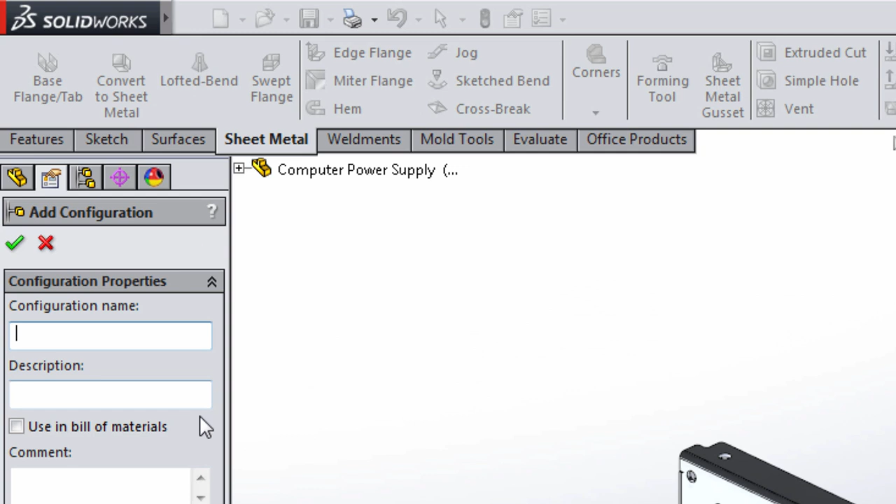To do this, however, we need to start in SOLIDWORKS and document the individual steps. I'm going to do this using configurations, and I'm going to label my steps based on number. So we're going to start with step 1. You'll notice that I call it step 01, and this is because SOLIDWORKS orders your configurations by the text, not the numerical value. So the very first step we're going to do is we're going to show this in its

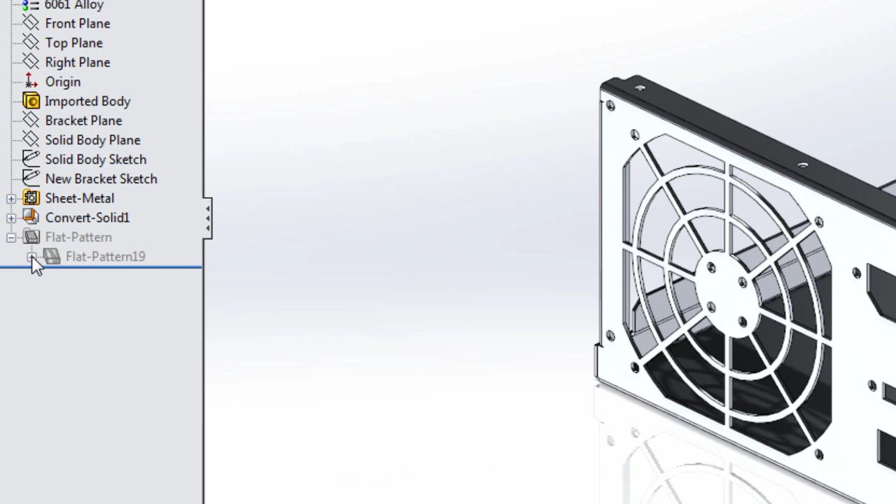flattened state. You can quickly click the flatten button to accomplish this, but another method you can use is going into the flat pattern feature file. You can actually suppress this flat pattern feature. This is ultimately what controls the flatten button inside of SOLIDWORKS anyway. So we've documented the first step. Let's go ahead and start to get into the actual forming operations for this part.

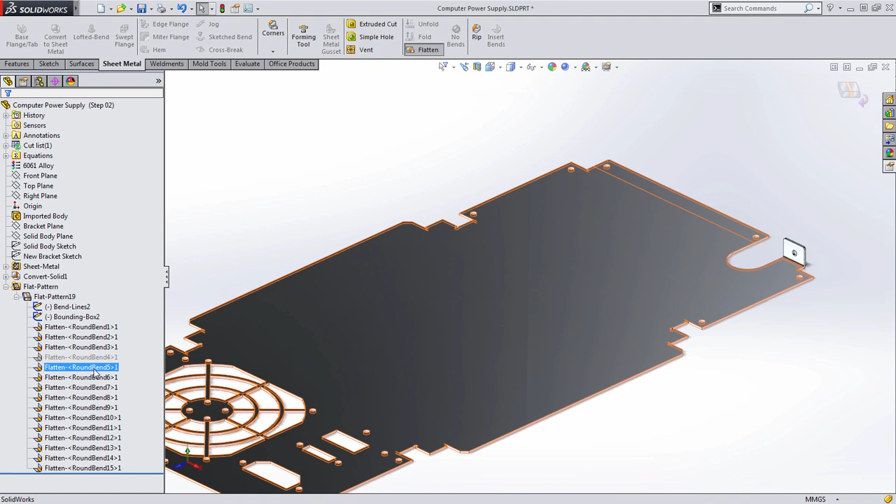I'm going to create another configuration called step 2, and what I'd like to do is show these flanges that need to be formed on the top. If we expand that flat pattern feature, you'll notice a series of flatten features in here, and when I hover over them, they show a line on the part for the individual flange or the sheet metal feature they're meant to unfold. All we need to do is suppress these individual features, and SOLIDWORKS will make the necessary features in the SOLIDWORKS model fold. So here you can see that I've created a configuration that shows just those flanges.

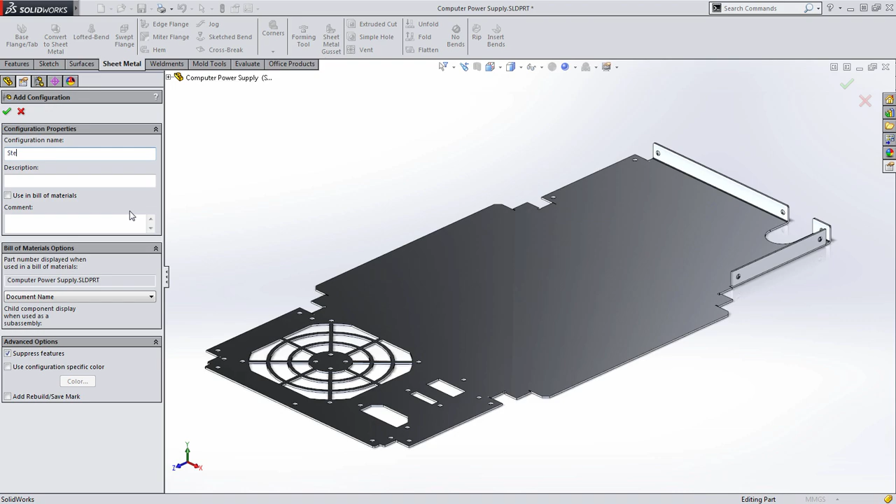Let's create another one, step 3. Again, we're going to perform the same process where we're going to go into the feature manager, find the relevant bend that we want to fold, and simply choose to suppress that flatten feature. We'll continue this process until the entire model has been reformed into the fully formed part.

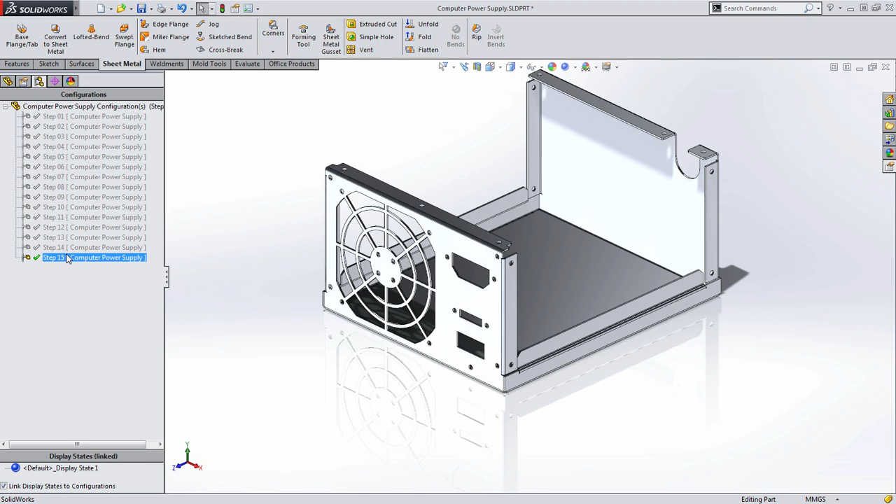At this point, we've created all but our very last step, but for this, we're going to go ahead and use the original default configuration. So you can at this point simply just rename that to be the last step in the process. So all of the configurations have been named steps 1 through 15 in this process. The final step is to share this, and to do this, we're going to go ahead and use eDrawings.

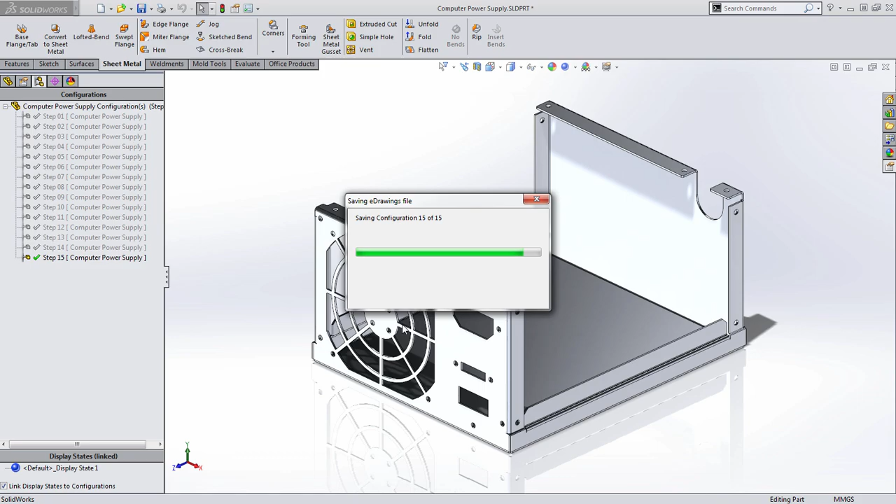At this point, you'll be presented with the option whether or not you want to choose specific configurations, the current configuration, or in this case, we'll choose all of the configurations to capture all of the individual manufacturing steps for this part. As I go ahead and click Publish, you can see that eDrawings is capturing each one of these, and it's going to create a file that you can email to anybody, which they can view on a PC, a Mac, or Android and iOS mobile devices.

When they open the file and receive it, they'll be able to see all the configurations that make up this part right here. They're also easily available over here on the left-hand side when you expand the Configurations tab. You can quickly click on each one of these to see the step-by-step process and how this part is put together, and quickly navigate through the individual steps. This makes it very clear what your intentions were for this part to be manufactured.

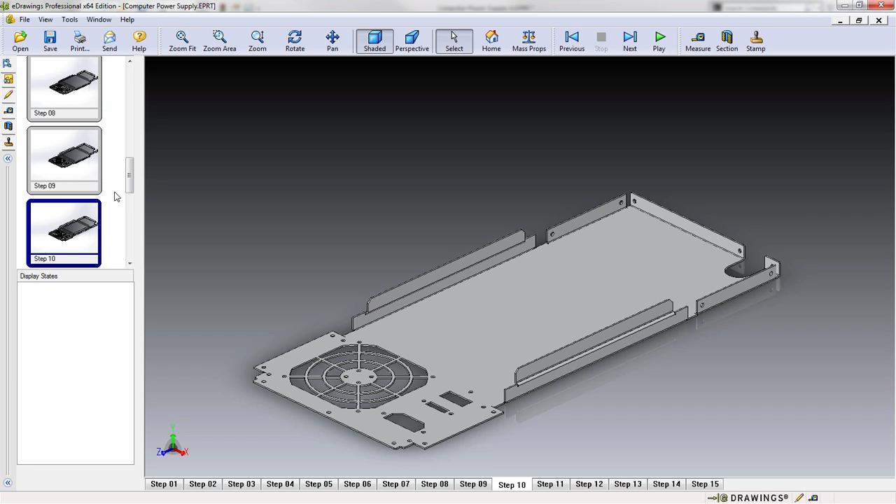This is just one quick way that you can use eDrawings to communicate unique ideas with your customers, suppliers, and vendors.